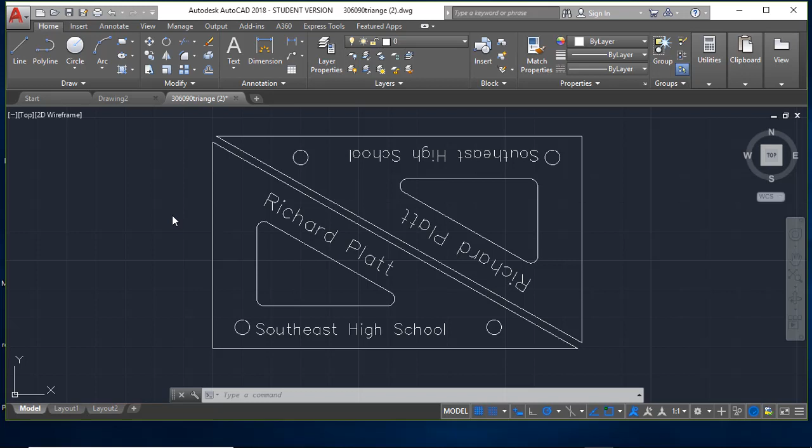This tool right here, the 30-60-90 triangle, is probably one of the most powerful tools we can ever learn to master. In this exercise, we're actually going to use a CAD tool to design and make our own 30-60-90 triangles, as opposed to buying them off the shelf. This will be a custom product we can keep for many years and get a lot of enjoyment out of. In this case, it's customized using my name and also the high school that I teach at, which is Southeast High School.

Also notice these circles right here. They are the actual length of the first two rings in any standard binder you may use for your class, for your engineering portfolio binder. So in the process of making this, and to have a better and more efficient use of materials, we'll actually make two of these, where you can keep one at school or work and keep one at home on your desk where you do your design. So let's get started.

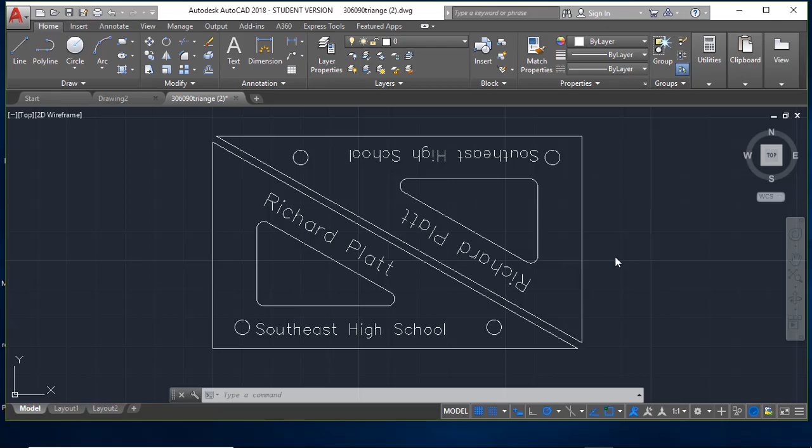Okay, before we get started, let's take some measurements so we can have that for our design. Now, I'm going to use these two triangles that I've already created to get the measurements that I need. And the most important one is this bottom dimension right here. So what I'll do is go to my Home tab, come over here to Utilities, and come down and hit the measurement command.

We're going to select distance. I'll start right here at this point on this corner. Oh, first, before we get too much farther, let's check on what snaps we have. Verify that you have midpoint checked, and actually all of these checked: endpoint, midpoint, center, node, quadrant, intersection, extension. I always like to make sure I've got perpendicular and tangent checked too. Critical in a lot of what we do is this quadrant right here, so we can make sure we're able to get some of the things we need to measure. I'm also going to check on parallel as well. Once I've selected the ones I want, I'll hit enter to get started.

So again, since I've started, I select on that one point. We'll come down here and select on this point right here. Now it says our X dimension is 6.25, six and a quarter inches. Let's go ahead and write that down.

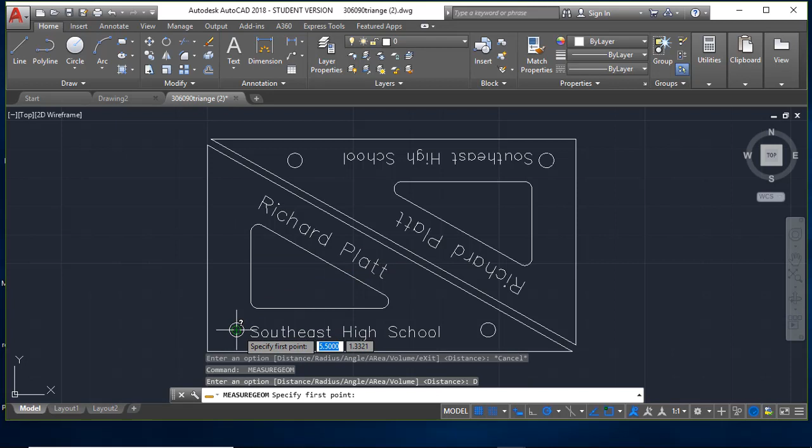Now, quickly, let's go ahead and escape out of that, hitting the escape command. And now I'm going to go spacebar again, and I want to measure distance. At this time, I'm going to select on the interior of this circle, click, and come over here to the interior of that circle. I didn't get it that time, so let me get out of that. Spacebar again, distance, select that, come over here and select the center of that circle. That gives me a distance of 4.3125, which is 4 and 5/16ths. Let me write that down, 4.3125 for my whole distance.

It's always good to make good design notes as you're designing your products. Okay, so we'll stop here for now once we've got this information.

Okay, we're going to do a couple more measurements here real quick. Let's go back to our utilities, go down to measure, and we'll say distance.

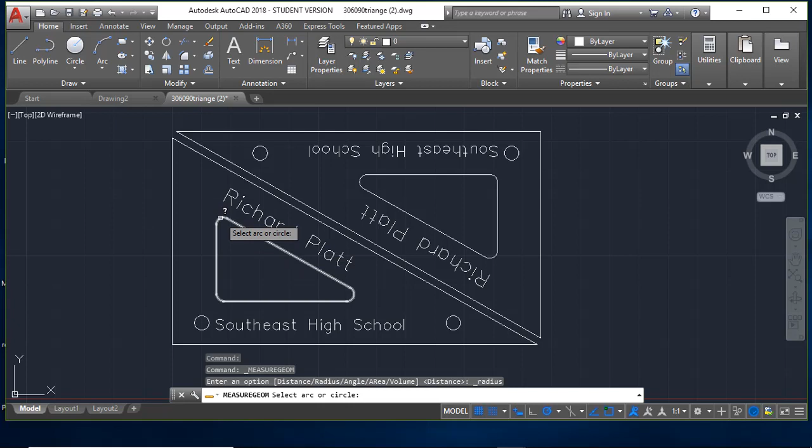Actually, before I do that, let's go ahead and check radius on the circles and arcs. Right here you see an arc, here you see an arc. Let's see what that radius is. It's telling us the radius is 0.125 for those fillets, those rounded areas on the inside part of the 30, 60, 90 triangle. So 0.125, which is 1/8 of an inch.

That's good. Now what I want to do is measure the distance. Let me escape out of that. I want to measure the distance between this line and this line here, so we can look at how far we need to move once we've rotated our first design and copied it to this location and position, maximizing the materials we're using.

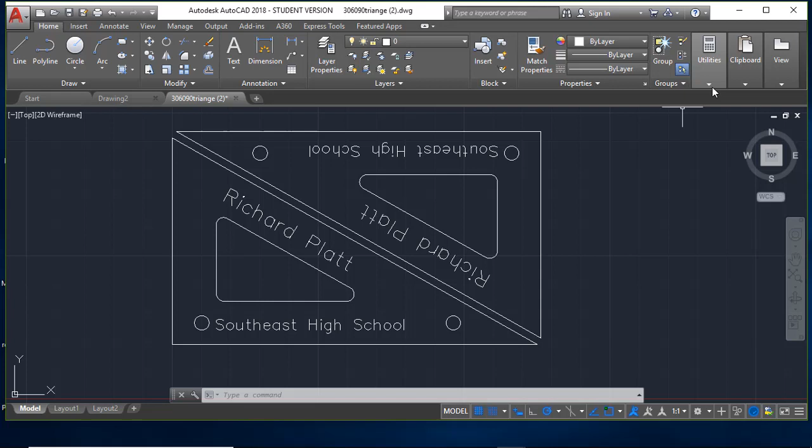So back to utilities, back to measure, and now let's get the distance here. I'm going to measure from here, zoom up on this, find the midpoint of that line, which looks like it's right there. I'll come across, making sure I'm perpendicular, as you can see here, to the other line. That's giving me a length of 0.125. I need to write that down, 0.125, the parallel distance between the two 30, 60, 90s.

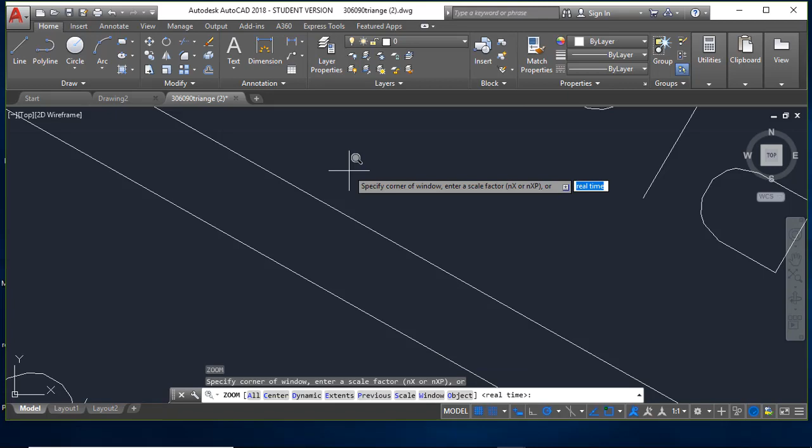Excellent. Escape, get out of that, go ahead and hit the Z key to zoom to extents, which is the extent of the file. Now normally in the AutoCAD certification test, you're going to be using the zoom command from over here and using the palette ribbons, as opposed to keyed commands like DI for distance or Z for zoom. So that looks pretty good, and now we'll come back to that in a moment.

Okay, now what I want to do is figure out which font I'm actually using when I create this. If you notice, this is a standard old font that is used often in AutoCAD drawings. We're going to use the same font here instead of a true type font. The reason being is that we need to learn how to use these fonts because they're very commonly seen in engineering, drafting, and design.

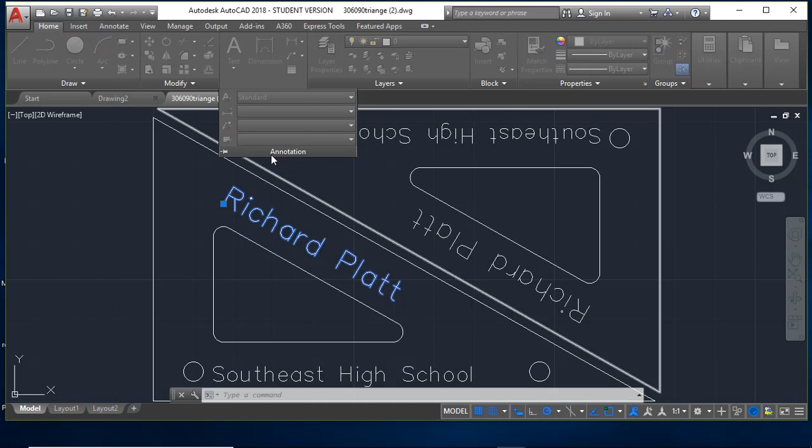So let's select the font here, highlight it. We'll come up here to annotation, down to standard, and say manage text styles. Once it comes up, I want you to notice up here in the font name where it says DIM SHX. Let's write that down and we'll use it. As far as the size goes, we'll basically set that font size as we design the 30, 60, 90 triangles. Okay, let's cancel out of that and we'll get back to this again.

Now that we've got our actual measurements, we want to create a new file. There's a lot of ways to do it. You can hit the pull down here and say new and launch it that way. You can also hit right here and it'll say new, creates a blank file. To me, the easiest way when I'm wanting the standard AutoCAD template is just hit the plus sign right here on this tab. Hit that plus sign and there's my new drawing. So I'm ready to get started.

Now we've got our measurements, we know what we need to do. So let's zoom up a little bit here and go over and hit the line command. With the line command selected, it says specify the first point. Well, wait a minute. Before we actually do that, let's change our polar tracking. We'll click on this, and because we're drawing a 30, 60, 90 triangle, we're going to select 30, 60, 90, 120. That will be our polar tracking, which will help us design our diagonal line much easier. So I'll select that. Now let's get started.

So we're going to come in here, I'm going to click on this first start point right there, and as you can see the green highlight. Now I'm at a distance of 10.7374. Well, I'm going to go ahead and come back here to about 3, and I'm going to key in 6.25 and hit enter. And so there's my line for my 30, 60, 90, the bottom line here. Now let's escape out of that for a second.

Now let's do a zoom using our ribbon over here to the right. Hit that pull down and say zoom to extents.

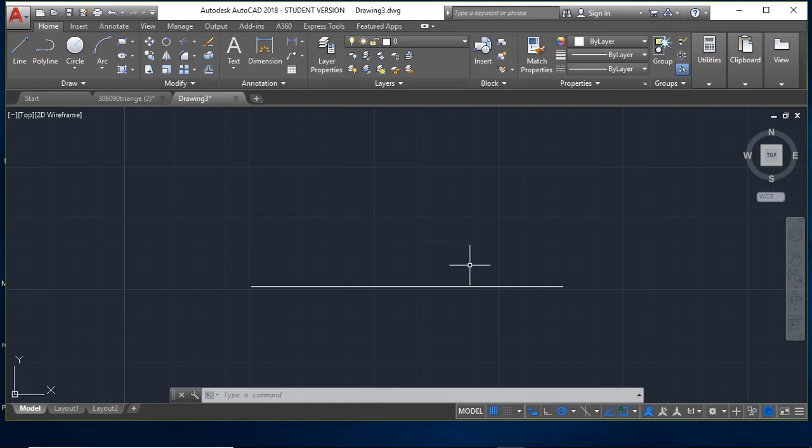Again, to access the line command, I can select it here, or I can hit the space bar, or I can hit the arrow key. So I'll hit the arrow key, and there it is, line. I'll hit the up arrow key, and hit enter. Now it says specify first point.

Since I've got my snap tracking on, as you can see right here, snap, I can come over here and highlight on that one endpoint of that line and click. Now what I'm going to do is draw all the way up here, and you can see my 30-degree diagonal line. Let's zoom out a little bit here.

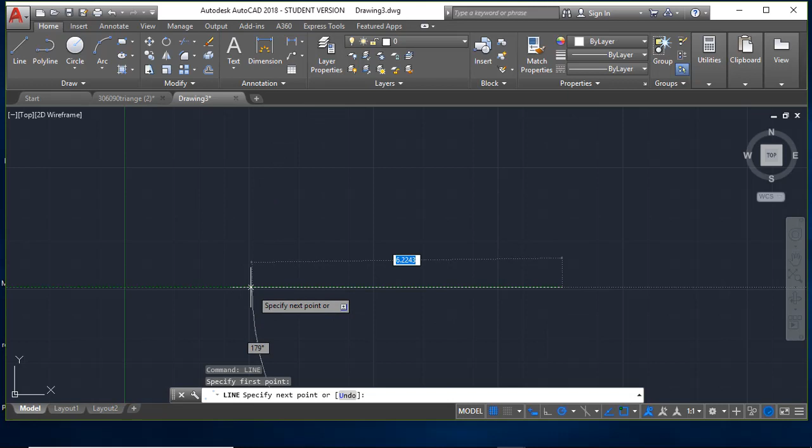Now to get that line the right distance, I'm just going to snap to this end. Don't select it, just select that one little green point there. And I'm going to go up to 30, 60, 90. You'll see my actual diagonal line come up here in a moment. There it is, you can kind of barely see it. Let me scroll down a little bit. There we go, and so you can see that now I'm at 30, 60. So I'll click on that.

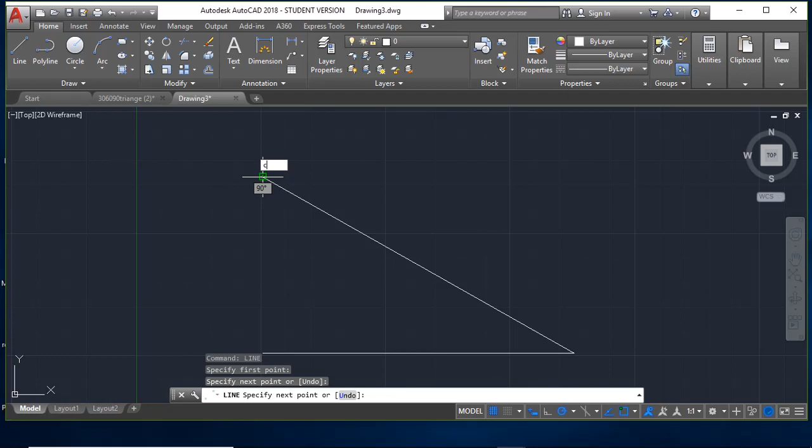Now I'll just hit the C command and close this. Whoops, I'll come down here. It says I don't want to do that, so that's fine. So now we'll come down this way, hit C and close.

Let's just go ahead and draw the line in. There we go, so we'll just draw that line in. Now if I set a polyline, it probably would have been a lot easier to do that. Well, there we have it. So we have our 30, 60, 90 triangle at this point. Let's go ahead and pause for a moment.

Okay, let's make the interior hole of our 30, 60, 90 triangle. So next what I want to do is come over here and use the offset command, which will allow us to copy parallel. Again, here's all your modify commands up here, as you can see. So we'll hit the offset command.

Now it says specify the offset distance or through erase layer. Well, let's go ahead and do that. We know that distance is 0.75, or 3/4 of an inch. So we'll say 0.75, and just hit enter. It says select object to offset, so I'll go ahead and select this guy here. I'll come to the interior, and select by offset object, go to the inside there, and come over here and do the same thing with this one here.

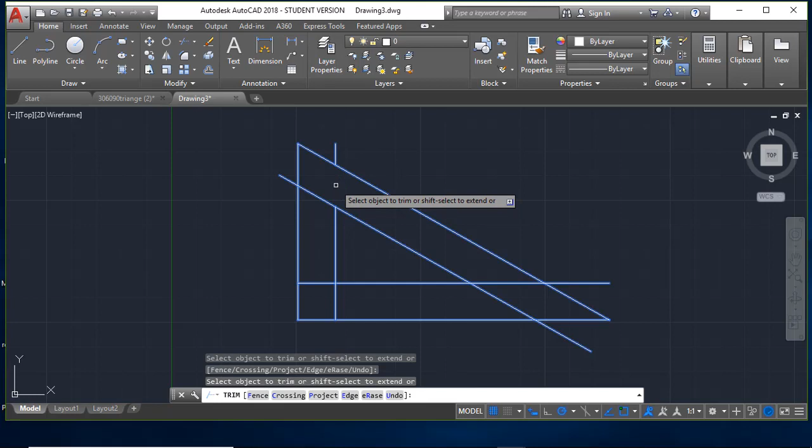Okay, so now we've got these objects here offset, and we've got to trim these lines up. So I'm going to escape out of that, and I'll come up here to my trim command and click on it. So now I'll select all these objects here, all these lines, and we'll go ahead and trim these objects. We'll click on this one here, hit enter first, and we'll click on this one here. We'll come out here to this guy first. Now we'll come into this guy. Same here, same here, same here, and same here.

Now what I can do is go ahead and hit the escape command here. I'm going to select that object and that object, and what I'm going to do now is hit the erase command, which is the E key. So E to erase, and now they're gone. Okay, that looks pretty good.

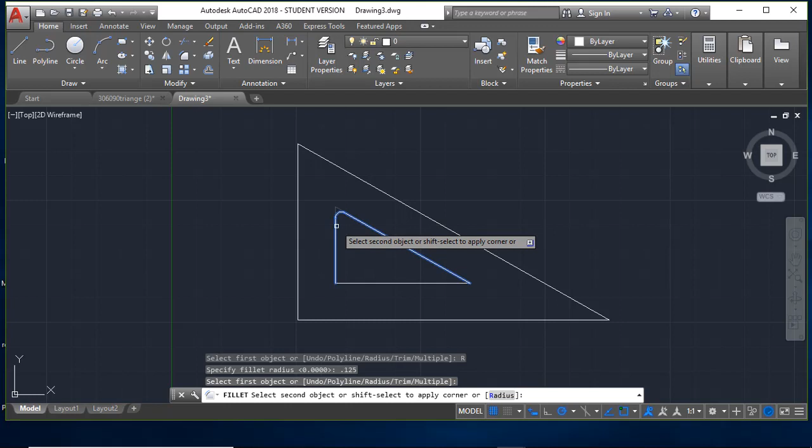Let's go ahead and do the fillet, which if you look up here, you've got fillet and chamfer and blend curves. We're going to go with the fillet. Now it says select the first object or undo radius. So I'll key on the radius here of 0.125, again, that was from our notes gathered off the last design. Select first object, I'll select him, and I'll select him, and there he is. He's gone ahead and done the fillet as we need.

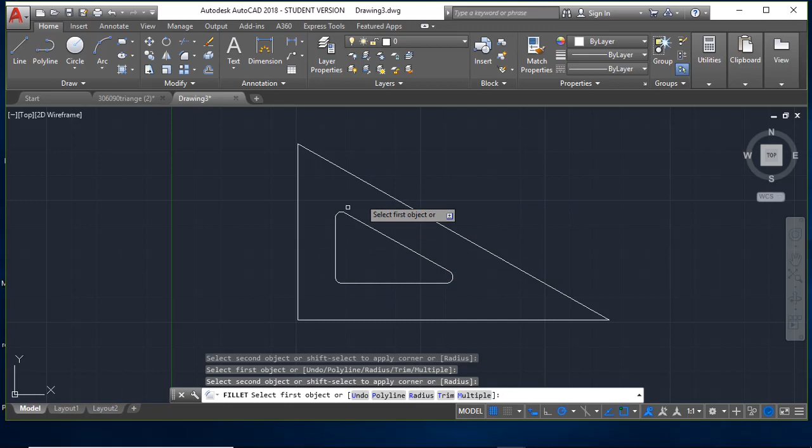Hit our space bar again, and this time I'm going to select multiple, and I'll select him here and this one there. As you can see, it did that. Now we'll go ahead and continue this one and this one. So that part of our 30, 60, 90 is drawn, and it's in our nice circle at 3/4 of an inch on all three sides. Okay, we'll stop here for a moment.

All right, I'm going to draw my circle now for my holes for my binder. So I'm going to hit the circle command, circle by center radius. That's going to be good.

I'm going to use a technique called temporary tracking, where I'm using that corner as a reference point to draw my circle from a specified distance. I'll hit TT, enter, move out to the right, and key in 0.5, hit enter. Then I'll go up in the vertical and key in 0.375 for that. That specifies the center point of the circle. Now I'm going to key in 0.125 for my radius, and hit enter. So there's my circle.

Now let's check the measurements on that. Let's go over to measure, go to distance, and click on the center of the circle. Coming over to the side, it says 0.5 just below the perpendicular word. Coming down here, it says 0.375. That's excellent. We'll escape out of that.

Now we've got to draw the other circle, the middle ring that holds this in the binder. We'll come up here to this circle, hit Command, and select that. Then come to the center of it, and go off to the right using our polar tracking, and key in a number of 4.3125. We'll hit enter, and it creates this ginormous circle. Well, that's not what we want. We know our radius is going to be 0.125, so we'll hit enter there. And so there's our circle.

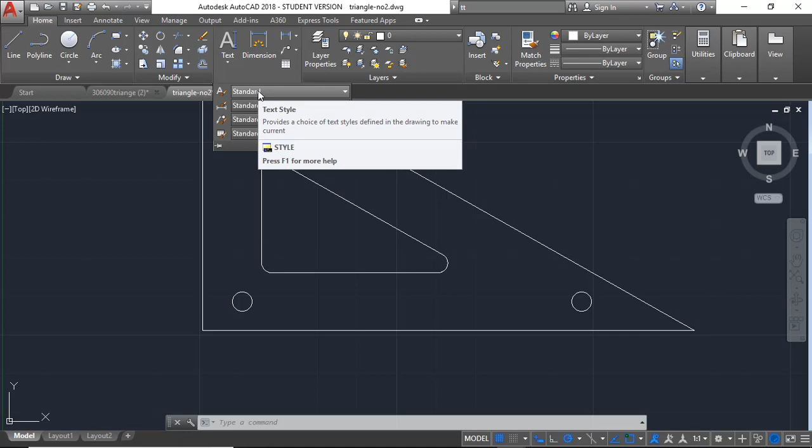Before I start putting the text in for Southeast High School, or whatever your school or business is, I'm going to check my annotation. I'll come up to the annotation pull down bar and go to the first one, text style. I'll click on it and go to manage text styles. It's automatically come up as True Type font for Arial, but that's not the one we want. We want more of a Leroy font, a standard old drafting font you'd see on a lot of AutoCAD drawings. It makes drawing and managing your files a lot easier.

So I'm going to scroll down and see if I can find that font. I've got a lot of fonts loaded on my computer. Let's keep going until I find it. And there it is, DIM SHX. Click on that, hit apply, and hit close.

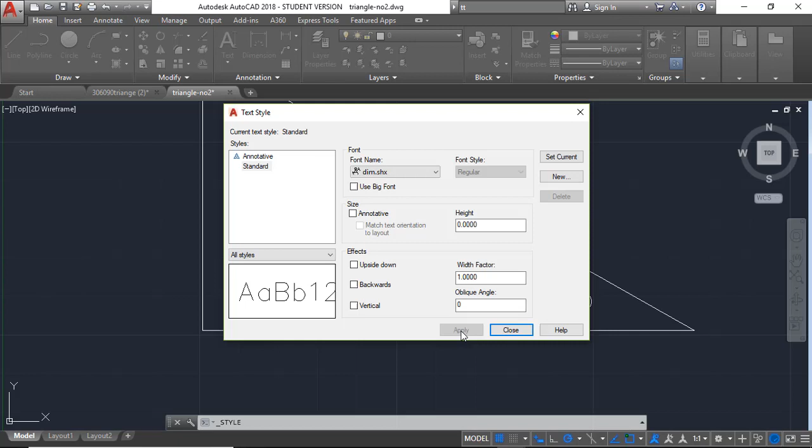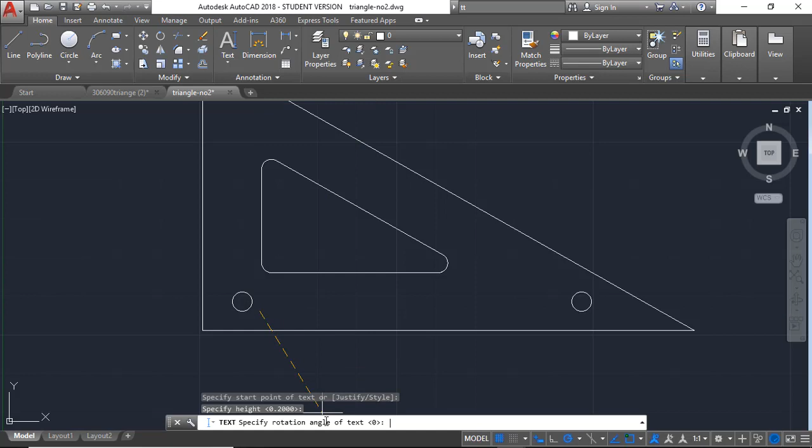Now I'm going to select my single line text, and come off the very bottom of that circle using polar tracking. It says specify the start point of your text. I'll click here, and now it says specify the height, so I'll just hit spacebar. Now it says specify the angle, I'll hit 0. Then it asks for the text, so I'll key in Southeast High School. Hit enter, hit escape, and there it is, Southeast High School.

Now I want to key in the diagonal text for my name. It's always important to put your name on your property, especially your drafting instruments, so they don't get taken. So I'll come back up to text, down to single line text.

This time I'm going to specify a start point off this one edge of the circle. I click on that, come up here, see my polar tracking kicking in? That's what I want. I'll come up to about right here as my start point. It asks to specify height, so I hit spacebar, then specify angle of rotation. I'll click on my 30-degree diagonal line to start. Now it brings the cursor back up for input, and I'll key in Richard Platt, then hit enter.

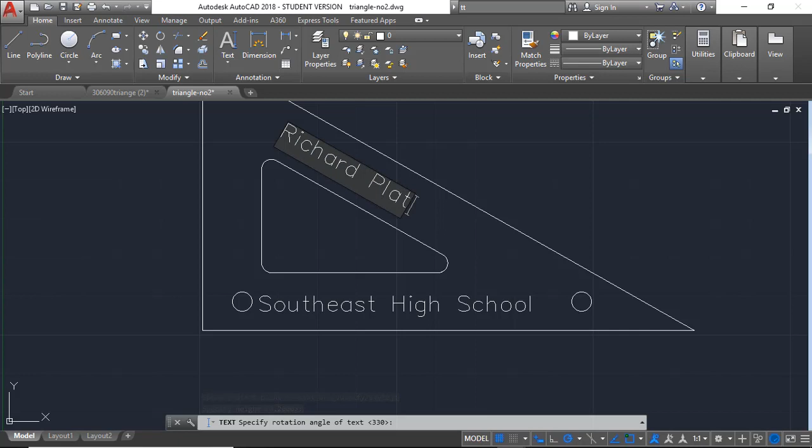It's going to drop down like another line, and I'll hit escape. So there it is, my name is actually in there, and you can see how I've designed this triangle. That looks pretty good. We'll come back to this in a moment and make a copy of it and place it on top.

Now what I want to do is roll out with my middle mouse button, kind of zooming out, hold it down and pan down a little bit. Let's double check we saved our file. Doesn't look like I've done that, so I'll hit save.

Then I'm going to come back here and select from the right to the left, so that makes sure I get everything. And I'm going to come over here to where you see the copy command on the ribbon, so I'll select that, and it says specify the base point of what I want to copy.

So I'm going to come down here to this, and then move straight up to the top here, pretty high, and click right there. So I've made a copy of this. Let's go ahead and hit the escape command. So now we have our 30-60-90 as we see right here, our duplicate copy.

So we've got to rotate that around and make sure we have it put back in place so we can optimize our material. Let's go ahead and select the new copy. We'll come over here to rotate, and it says specify base point. I'm going to come up here to the top and find my polar tracking.

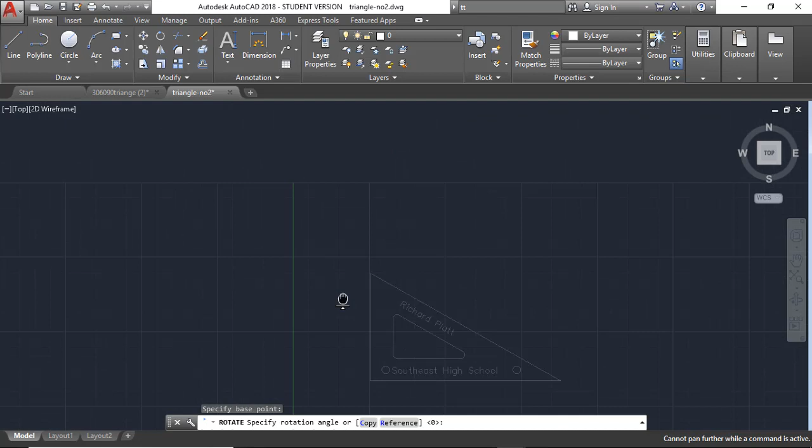I'll zoom out a little bit so you can kind of see it, and pan down. As you can tell, as I go down here to this angle, it comes in rotated at the correct angle. So I'm going to go ahead and hit enter. Whoops, we'll do that again.

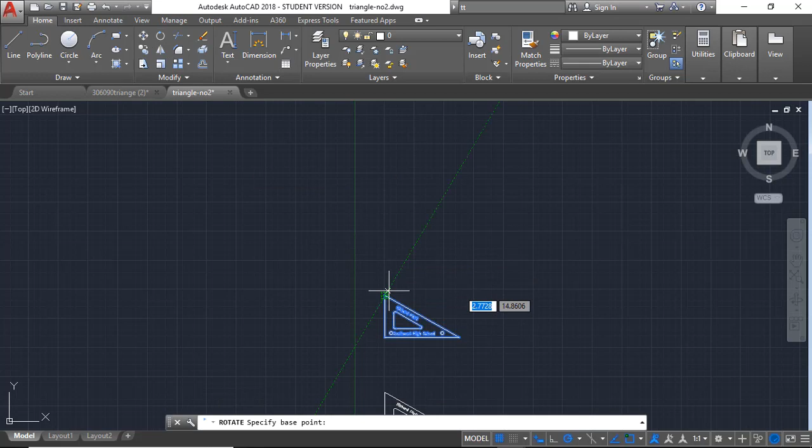Roll out, select it all, double check here, hit escape, left to right, rotate. Okay, specify my base point. I'll come up here to the top again, and rotate around to this point and click, and there it is, rotated. Should have done that the first time.

All right, so let's roll up on this a little bit because we're going to move it now. So I'll select all of this. I'll hit the move command this time, and I'll go to my base point that I want to go to.

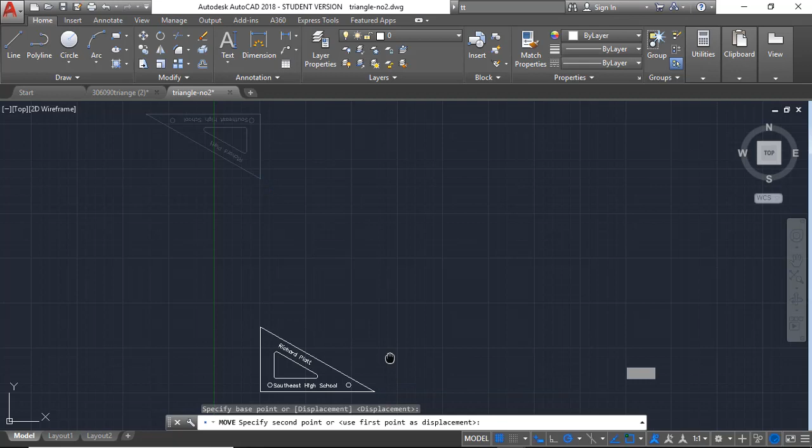Now again, save your file, and let's get this file ready to laser engrave.

Okay, the last and final step for us on this project is to get this file that we've just created over to our laser engraver. In our case, we're just going to attach this file as a DXF and email it to ourselves. So let's get started doing that.

So I need to save this file as a DXF. I'm going to come down here and say Save As, click on this, and make sure I'm in where it says my triangle hyphen number 2. I'm going to come down here and select AutoCAD DXF. The latest version I'm using is 2018, but whatever your version is, go ahead and select that. So I'll select that, and it's going to give it the same name.

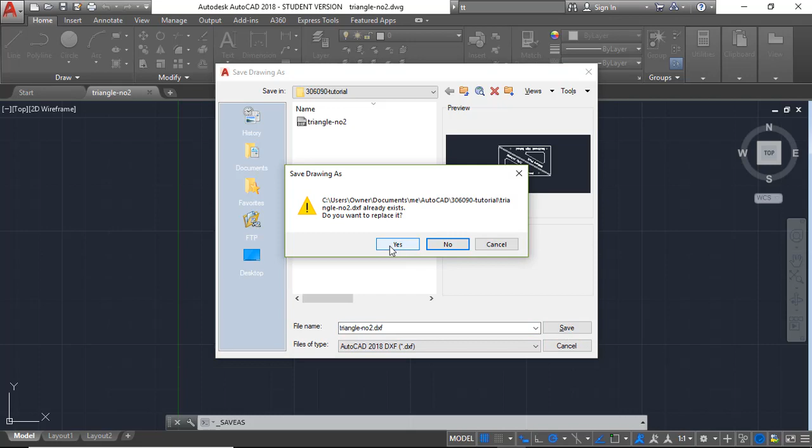And hit OK. I've already created it once, so I'm going to go ahead and delete it, or go ahead and write over it.

Okay, now that I've saved that, I'm going to come down here to my Gmail account, and I'm going to send myself an email. Let Gmail come up, and immediately I'm going to compose a message. Give Gmail a moment. And I'll come over here and send this to myself.

In my case, it's Texas Flatman, and I'm going to email the file to myself, and I'm going to say '30-60-90 triangle' and 'to laser' as the subject.

Now that I've sent it to myself, I see my email already come up. Then I'll get into Gmail on the computer by the laser engraver, download this file and open it, and it already works. We'll continue with that soon.